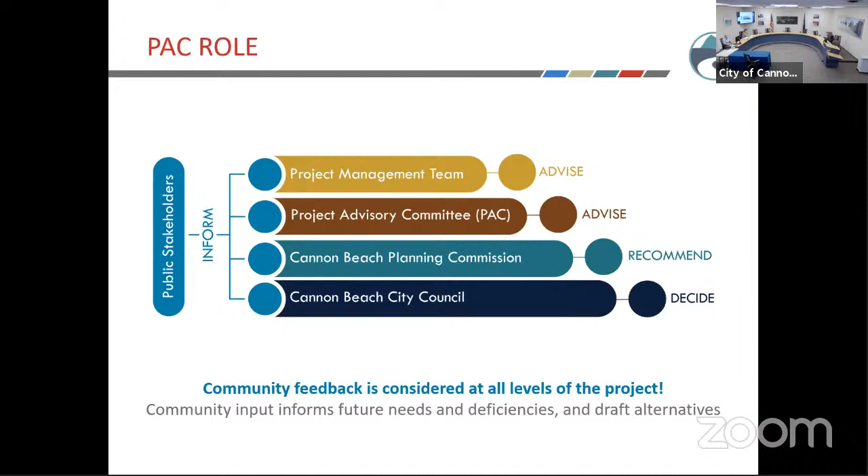One of the things I think that's important with this TSP is that it's a chance for us to approach our community, ask them what their transportation concerns are, their parking concerns. Then that is filtered through the project management team and our project advisory committee, and then it's filtered on to the policymakers, the planning commission and city council, and then they get to make those important decisions on our transportation needs for the next 20 years.

Our community engagement, what I've been really impressed with is how many people have been involved in this so far. The online open house, as you can see from the statistics up there, 161 comments, 271 parking survey respondents for over 400 total.

What I also want to impress upon you, even the raw data from that, everyone's comments that were received are now available up there on the website. So if you get a chance, just read through those comments, some great comments that we got back from the public. So we had an online open house, the first one.

We ran 2 different surveys, and we've held an online open house and a public webinar as well. We've had project advisory committee meetings, and now we've just finished our second one today.

And like I said, we got a little extra funding, so we've been looking at the supplemental parking survey, but that also got us some more information where we got a chance to do more traffic counts and parking counts as well. We'll get into that here in a bit.

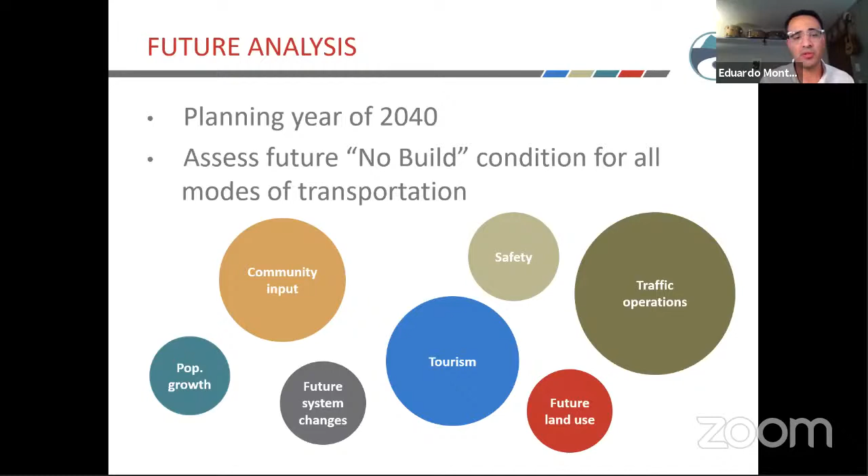We also did some more quantitative research and kind of science-based analysis, and that really lives in that bubble that says traffic operations. So that refers to actually looking at existing traffic, projecting out what traffic will look like into the future, and then making some assumptions about how traffic will operate and what we might be able to do about it. So anyway, the next few slides will hit on some of these bubbles.

These numbers, by the way, are from the Portland State University Population Research Center. That center publishes population research and forecasts for the entire state on an annual basis. So this was our best data set.

If you compare that to the county, it looks like it will grow a bit faster than the city as a whole, growing 4.6% by 2040. And if you compare it to Oregon, the comparison is pretty drastic. In 2020, Oregon is at about 4.2 million residents. By 2040, that's projected to jump up to 5.1 million, representing nearly a 20% jump.

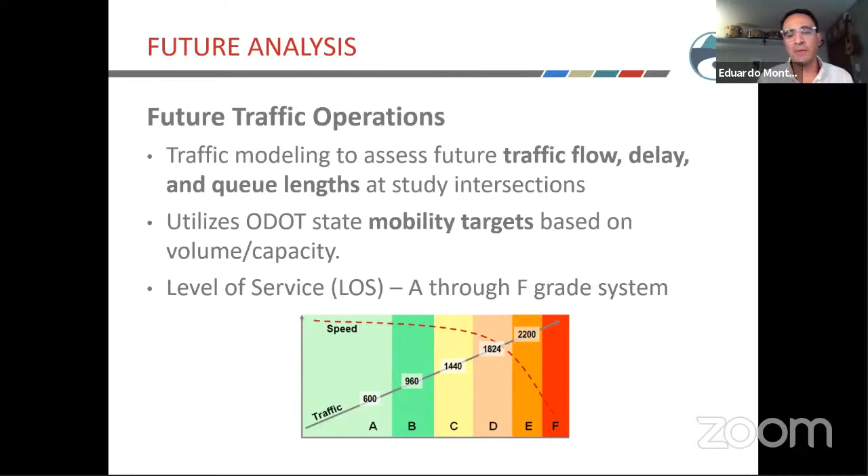The last measure I'll highlight is level of service, which is like an A through F grading system for traffic flow through a given intersection. A means free flow conditions with no delay, and F means complete gridlock where you can't get through. Next slide, please, Jeff.

Just so you know what that means, basically a VC, or volume over capacity ratio, of 1.0 means the facility is at capacity, and anything above 1 means you have substantial congestion. So basically, anything over 1 is not good.

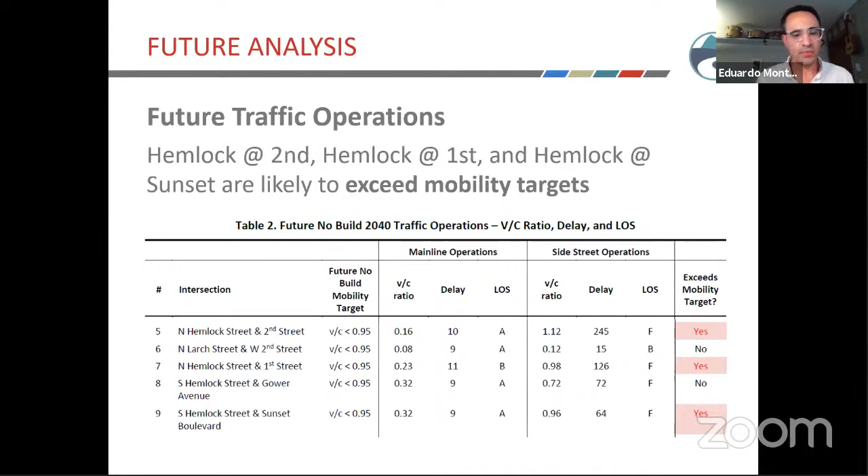The final column in the table shows whether future operations exceed those mobility targets of 0.95. You can see that in this example, there were a few places where we anticipate substantial congestion in the future—at Hemlock and Second, Hemlock and First, and Hemlock and Sunset. As residents, I'm sure this is no surprise to you. Next slide, please, Jeff.

Next slide, please, Jeff. And Eddie, I don't know if you want to, Lila's raised her hand. If you want to wait and when we do a transition, maybe speak then, or do you want to go ahead and handle it? No, I think it's fine to let folks jump in.

So Lila—Jeff, I think you probably have to be the one to unmute her though. Yeah, I've asked her to unmute, see if she can unmute. Okay, Lila?

Yeah, I just have a question. In Tolovana Park, I don't see any analysis of what's going on. And I know that we have a lot of speeding and a lot of parking issues down here too, so I'm just wondering why that section was left out of the analysis.

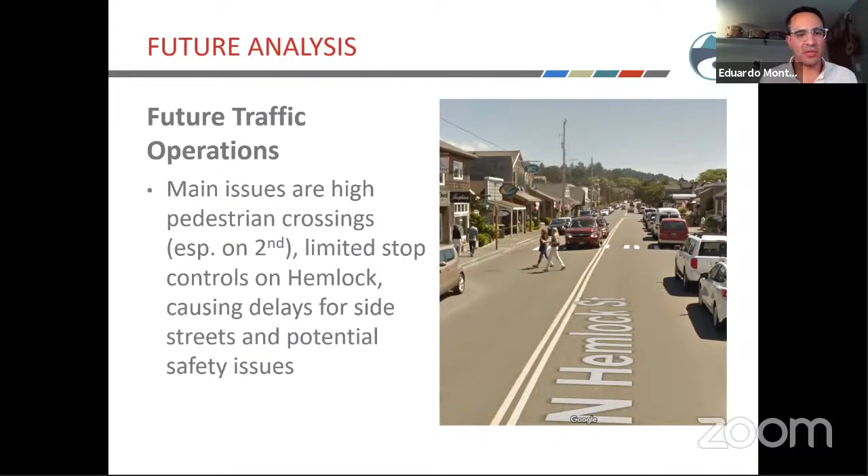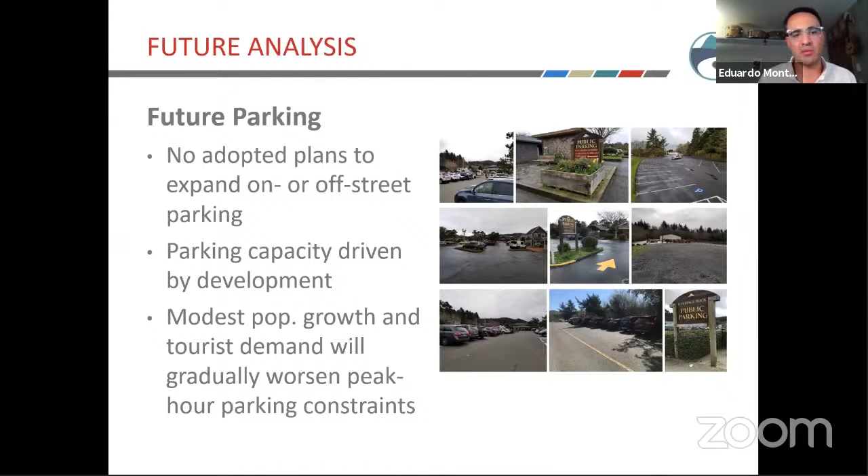So I kind of already made this point, folks. Really what I was trying to say here is, again, we looked at the network of facilities and capacity that the transportation system has today to try to understand what it would look like in the future. In terms of parking, it's the same story, there are no adopted plans to expand on or off-street parking right now. So any changes in future parking capacity would have to be driven by development. And again, any future demands or constraints with regard to parking are more than likely going to come from tourist demand and not necessarily from local population growth.

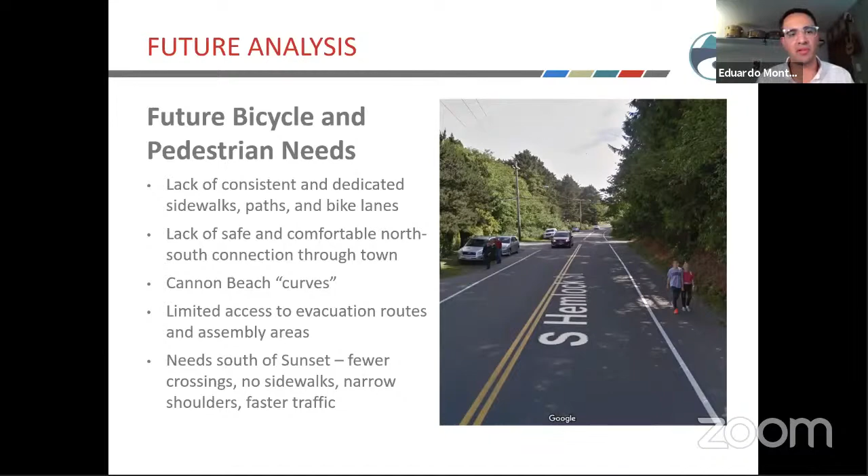And generally, needs south of Sunset Boulevard. As you move further south into the city, there are fewer crossings, no sidewalks, narrow shoulders, and faster traffic. We anticipate that these kinds of needs will persist into the future.

All right, I'm quite sure this is the last slide for this section. Just other future needs, transit. We heard from many community members that existing service is infrequent, and there are limited hours for both local and intercity travel. That's certainly something people will continue to ask for.

In terms of freight, the economy will surely continue to grow, and with that, gradual demand over time for freight. I think even more so now in the aftermath of the pandemic, with the explosion in e-commerce and food delivery and things like that.

One of the needs we identified from all of that is that there are few designated loading zones in the city. So the city might consider strategically identifying a few other places where freight can support the local economy. And last, again, emergency response.

As a coastal community, this is always going to be something we need to address with our transportation system. There will be a consistent need throughout the city for better access to assembly areas and evacuation routes, and also access to the hospital in Seaside, which is the nearest big hospital.

I think Eddie, that came up frequently, or at least in the PAC conversations, is that the congestion during peak season and emergency response, and the effect on that.

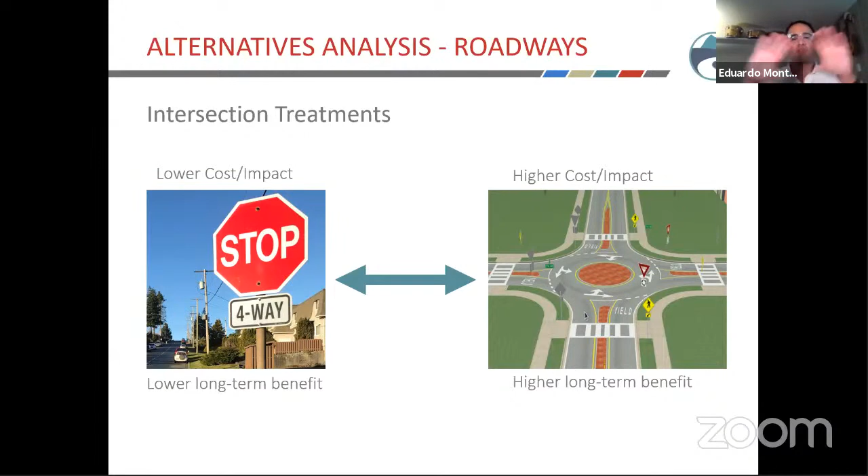There are other solutions out there. Where we landed was a range from a lower cost, lower impact solution like 4-way stops—in downtown and on Hemlock—to higher cost, higher impact solutions like mini roundabouts. These are newer ideas; you've probably heard of a typical roundabout, but these are very small roundabouts that can be adapted to Cannon Beach. In both cases, these are tools the city and community could consider to address congestion at intersections, and they'd yield different benefits and trade-offs—just to give you a range of what's possible and what might work.

Another idea was pedestrian plazas. We know the city's done something like this before—there's the farmers market, and also the 4th of July parade where the city temporarily shuts down the street and opens it up to folks. We think this can be a pretty good strategy for managing very busy visitor demands during the summer, and certainly something that could be explored on a temporary or pilot basis.

Another idea, and this one is probably a bit more of an eyebrow raiser, is something called Couplet Conversions, which basically takes 2 parallel streets with 2-way traffic and converts them to a pair of 1-way streets. You've probably seen this in other communities before, but the big benefit here is that it essentially splits the parking and traffic demand to 2 different streets, so it dramatically improves traffic operations—and we found that in our modeling.

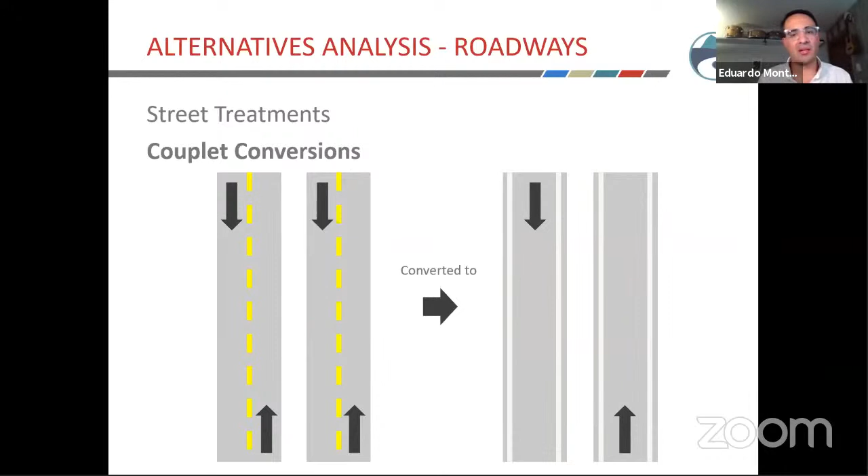And in addition to that, because you're going from 2 lanes to 1 lane in each direction, you also open up more opportunities for parking, bicycle facilities, improving sidewalks, things of that nature. So it can be a beneficial strategy to look into, as a pilot or something implemented seasonally, to address peak visitor impacts.

And I apologize, folks, I'm going fast. I just want to make sure we have time to talk about it. I don't think I'll spend time on this right now, just for the sake of getting through the material.

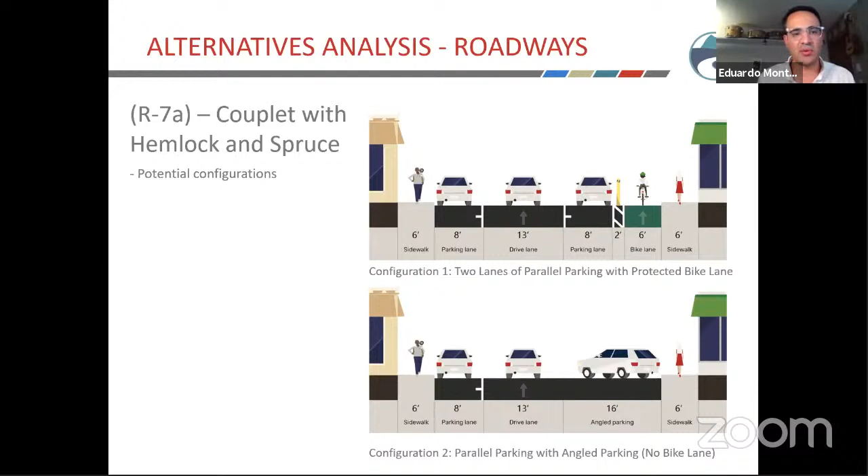Just to give you a sense, these are not recommended configurations for Hemlock and Spruce, but before taking this to the community, we had to test whether it would actually fit conceivably. So we came up with a few different configurations, but the takeaway is that there's not one way to do this—there are many ways. If the city were to pursue something like this, it would require a lot more conversation with the community to land on an actual recommendation for how this would be implemented. But just to give you a sense that we do think it's possible in terms of the space that's out there right now.

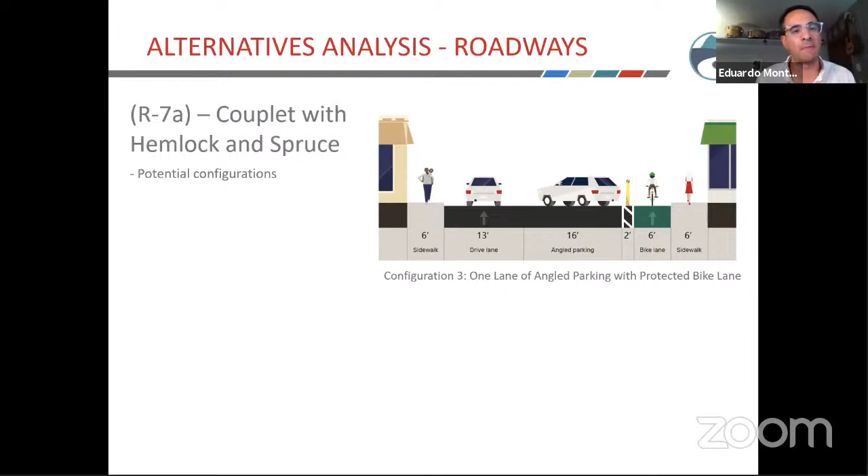All right, parking—ideas for managing existing parking. One of the easiest things we found, working with our parking sub-consultant who's an expert on this stuff, was just striping the existing on-street parking spaces. Might sound simple, but one thing we found is that tourists, especially if they don't come to Cannon Beach very often, might not totally know or respect how to park efficiently in downtown. So you have a lot of haphazard parking happening, and as a consequence a lot of space is eaten up, really impacting parking constraints in downtown. So by simply striping the on-street parking stalls that exist in the city, you could see some pretty significant benefits in terms of more efficient use of what's out there today.

Again, folks, I want to leave at least some time at the end, so I'm not going to read all of these, but the one I'll touch on real quick is remote parking lots and shuttle. This was another one we heard directly from community feedback. We found in our previous analysis of existing capacity in the city that while the downtown segment certainly gets clogged up, there's actually a pretty good amount of off-street parking in lots throughout the city. So if the city were to move forward with some kind of program to identify these remote lots and implement a shuttle to serve employees or visitors, that could be a really beneficial strategy for addressing parking in downtown.

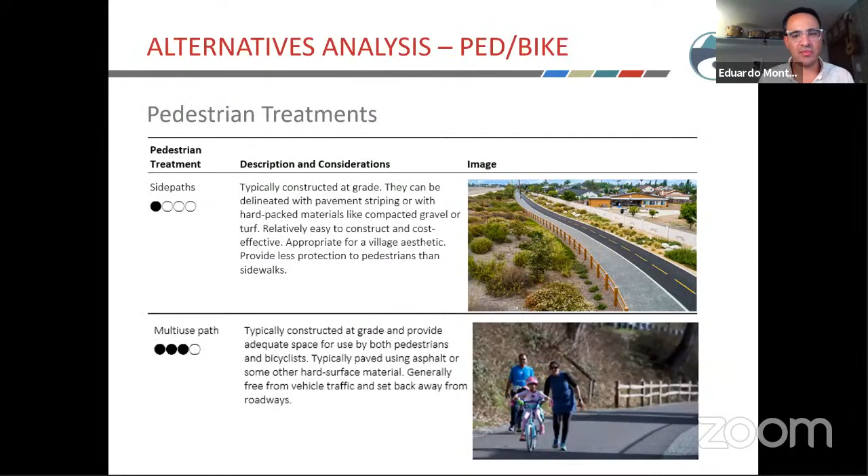Let's skip these next few slides, Jeff. This is just getting at the range of solutions we talked about for bicycle and pedestrian improvements. The takeaway is that we wanted to look at a range, and we know that building sidewalks all over town is probably not going to be feasible or really consistent with people's idea of the villages. So we looked at lower cost, lower impact options like side paths, compacted gravel paths, simple markings on the street to let you know bicycles are there, and things of that nature.

And in terms of transit, let's just go to the next slide. I want to hit on the comment about electrification. One of the things we talked about that's new, that wasn't in the previous Sunset Empire plan, was the exploration of this idea called mini mobility hubs—basically centralized places where you can access a variety of mobility options. So you might have regular parking there, bike parking, and also things like electric vehicle charging, electric shuttles. You might have passenger pickup and drop off areas for services like Uber and Lyft. All of this could be programmed in a way to really try to take a substantial cut out of the traffic and congestion in downtown. So, great comment—I forget who said that, but that was a good one.

Okay, sorry for rushing, but we made it to this point, which is the important part. We want to hear from you: which potential treatments are most appropriate for the village context?

Again, that's how we've been thinking about this from the start. We don't want to recommend anything that's out of context or inappropriate. So that's very important to us, in terms of getting it right.

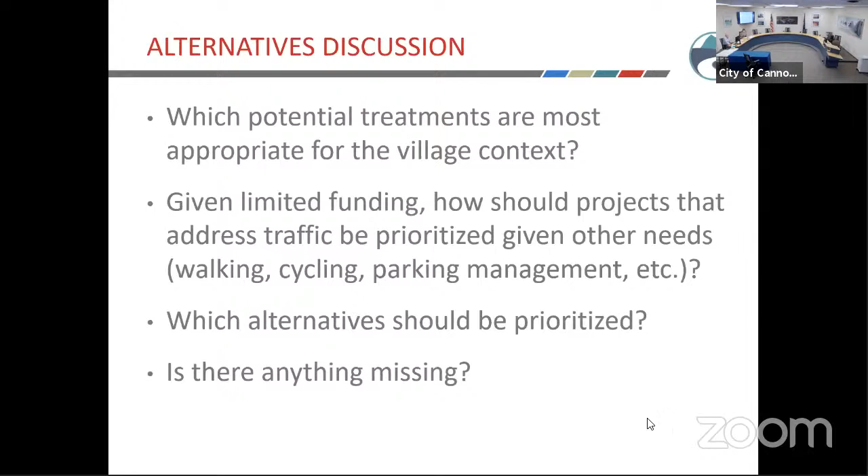For next steps, like I mentioned earlier, you can always reach me at my email address, adams@ci.cannon-beach.or.us. We are also going to be launching an online open house set for September 30th, running through all of October. We'll get press releases out to direct people to this open house so we can get feedback on these alternatives, and then we'll move into the preferred alternatives in the winter.

Go to the website if you can and read through these materials. Feel free to reach out to me. We've been taking notes, Eddie's been taking notes. We'll collect those, get back with Randy and some of these longer questions, and direct him to the materials where he can find the information he's looking for.

The only thing I would add is that the document you all have access to now is a draft. We'll refine that draft and reflect everything we heard tonight. Your voice is definitely being heard and documented, not just put away somewhere. We will absolutely incorporate it into our work. So again, thank you everyone for being open with us and sharing some great ideas.